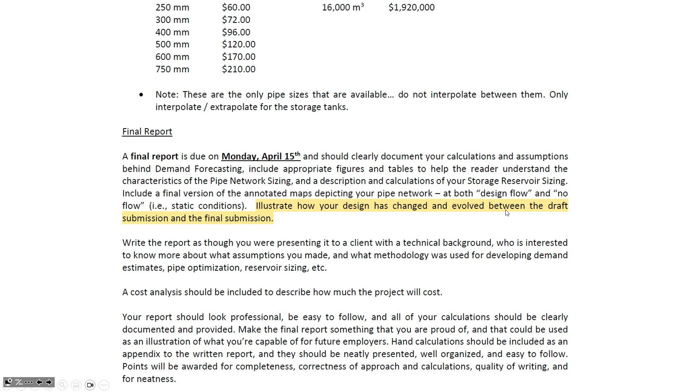All right, gradually varied flow is what we're talking about today. Where we've been recently is RVF. Does anybody remember what the R in RVF stands for? What have we talked about the last couple of lectures?

Oof, we should have had the quiz today. Rapid. Pardon me? Rapid. R is rapid. Good. Rapidly varying flow.

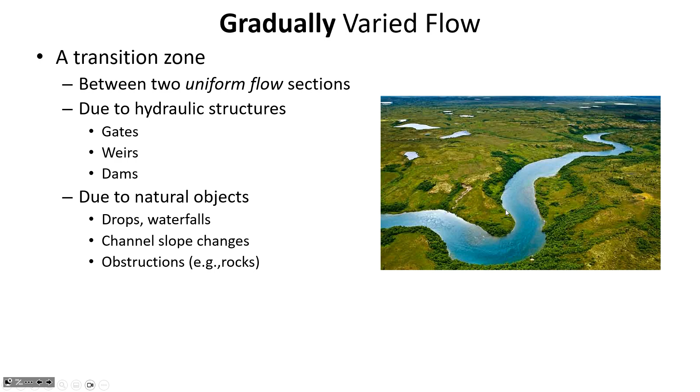Hydraulic jumps is what we've been talking about recently. A hydraulic jump is just a really dramatic increase in the depth of flow. Gradually varying flow is a lot more common than hydraulic jumps. We do see hydraulic jumps.

Like we mentioned before, flow out of spillways—we see hydraulic jumps sometimes in the rapids of a river. But hydraulic jumps are kind of an uncommon thing. When you see one, you'll be pleasantly surprised, you'll take note of it, because it's kind of uncommon to have rapidly varying flow. Gradually varying flow is all around us.

Manning's equation applies when flow is steady and uniform. So in a prismatic channel, where it has plenty of time to reach an equilibrium depth and where the flow rate isn't changing, that's where Manning's equation applies. That happens sometimes, but gradually varying flow is what we often usually see in nature.

Here's a depiction of a meandering stream. As the stream gets deeper in some spots, as the slope is changing, as the channel gets wider and narrower, the depth is constantly on the move. It's changing, getting deeper in one section, shallower in another.

So we need some sort of method that can predict for us what will be the new depth, upstream or downstream. If we know the slope of a section and the depth at one location, we want to be able to predict how deep the water will be a certain distance upstream.

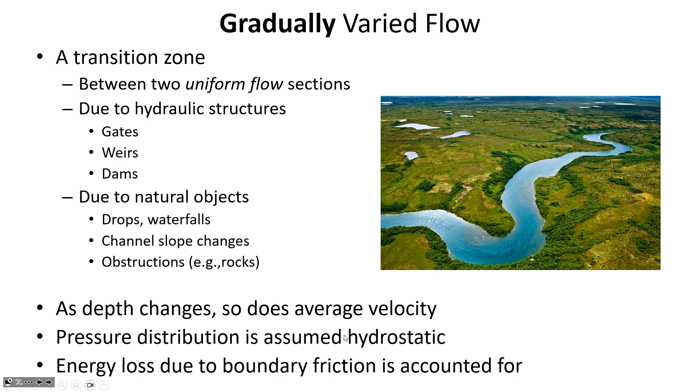We're also going to continue with the assumption I mentioned with rapidly varying flow, that we have a uniform velocity distribution. That's the one that maybe is like nails on a chalkboard, assuming that in a river, where in reality we know the flow is fastest at the top of the stream and velocity decreases closer to the bottom. For simplification in these calculational techniques, we sometimes have to assume the flow velocity is constant with respect to depth, not slowing down as we get closer to the bottom of the channel.

There are a few things we'll want to be able to look at and know what kind of water surface profile we have. There are abbreviations we're going to learn, whether we've got an M1 profile or an S1 profile. There are different zones and classifications depending on the slope of the stream.

We'll get into that a little bit later, but here are just a few illustrations similar to where I showed you previously, things that could cause a hydraulic jump. These are things where we could see gradually varying flow.

If you have an underflow gate where there was pooling upstream, the water is deeper than it normally would be. Here in uniform flow, we have the normal depth, calculated by Manning's equation, but the flow is no longer uniform if we have an obstruction like a gate. So there's pooling upstream, making the water deeper than normal, gradually increasing the depth as you approach the gate.

Or if we had water flowing off the edge of some drop, you can see how that would be reducing the depth.

As you get closer to the drop, the flow depth is decreasing. And you couldn't predict that with Manning's equation. If you knew the roughness of this channel and the slope of the channel, you can calculate the normal depth, but the normal depth doesn't apply because there's some other situation that's drawing down the flow. And so the gradually varied flow depth at a certain location wouldn't be predicted by the critical depth. It's not predicted by the normal depth.

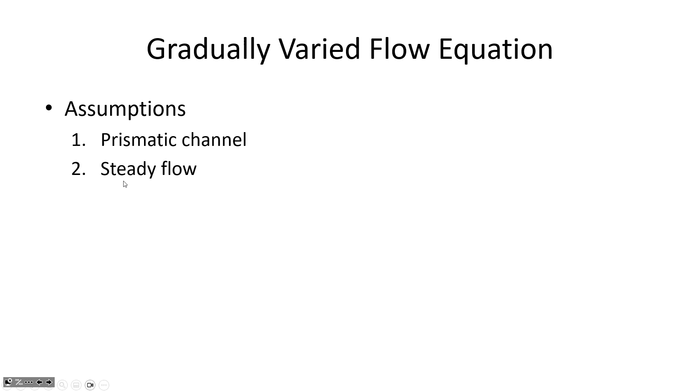So for the equations we're going to apply, we assume that we have a prismatic channel, meaning that we could draw a mirror image about the center line, and it's the same on the left-hand side as it is on the right-hand side. We're going to assume steady flow, so not uniform, but steady flow means that the flow rate is not changing with respect to time. The bed slope is relatively small, so this just allows us to assume that the horizontal distance is the same as the inclined distance. And then here's this really tricky, kind of unpleasant simplification: a uniform velocity distribution. We'll get over it though. There are more sophisticated approaches if we really need the precision, where we could get around that assumption.

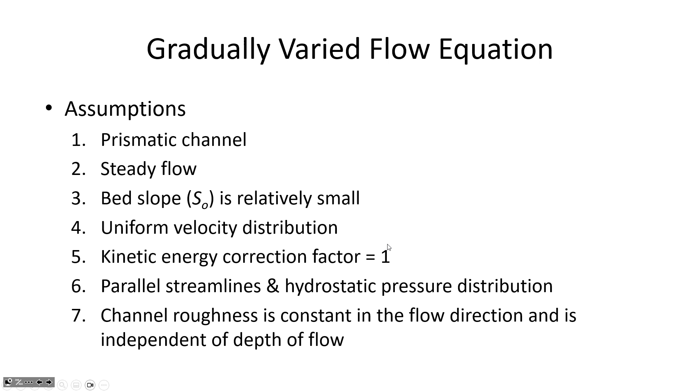The kinetic energy correction factor, you may remember that if you had laminar flow, then the kinetic energy correction factor is 2. We won't have laminar flow. Anytime the water is moving in typical conditions, you have turbulent flow. So we'll just use a kinetic energy correction factor equal to 1. That means the velocity head doesn't need to be adjusted beyond its natural calculation. Hydrostatic pressure distribution, parallel streamlines, and we're going to assume that between two points that we're interested in, the channel is rough to the same degree. So we're not going to introduce a change in the bed type between two sections.

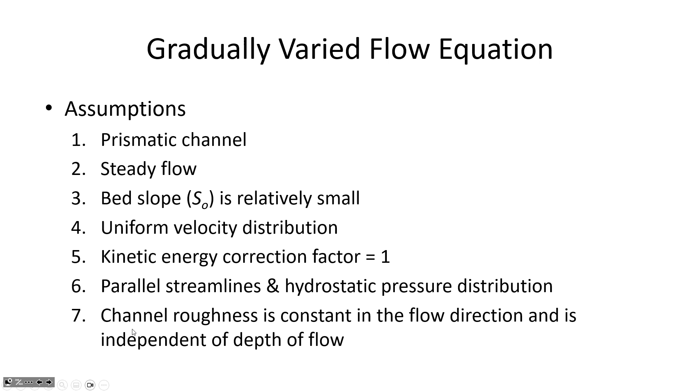So we wouldn't have gravel in one section and then sand in the other and try to calculate the change in depth between those two. We'd have to break it up into smaller pieces if we have a change in the material and the roughness in the direction of flow.

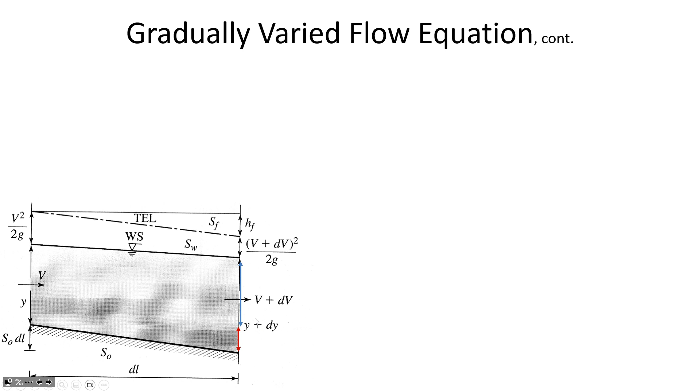So this is a non-uniform flow. The flow is gradually getting deeper downstream. You can see there's an increase in depth compared to the upstream location.

If we want to calculate the energy at any particular location, the specific energy is the depth plus the velocity head. The other thing we want to be aware of is that the change of energy with respect to a change in depth can be estimated with 1 minus the Froude number squared. So if we combine those two things together and substitute in the slope of the energy grade line for the change in head with respect to length, and the slope of the channel bottom...

That's by definition the change in elevation above a datum. So z was, if we have some vertical datum, z is the distance from that vertical datum up to the bottom of the channel. So you can see that as the water's flowing downstream here, z is decreasing, and also the water surface elevation is decreasing, and the energy grade line height is decreasing.

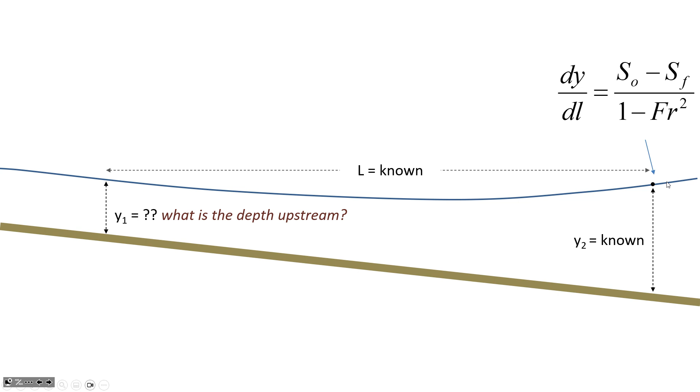So for this classical problem of gradually varying flow, we can use dy/dl to find the slope of the water surface, but only at a point. And here's kind of the problem: this is going to tell us the slope of the water surface at a point, but you can see that the water surface slope is gradually changing between the two points. So we couldn't use the slope of the water surface at just a single point to jump all the way upstream, because if we tried to find the upstream depth that way, we'd extrapolate that slope and it wouldn't match up with the upstream depth location. So you see, if we extend the slope over a really long distance, we can't approximate a curve with a line, not over a big distance.

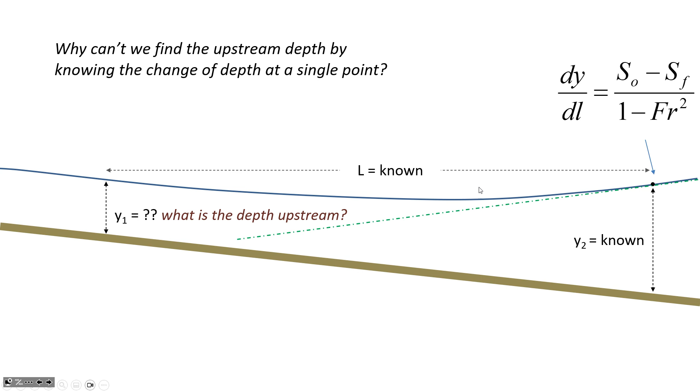We can get away with approximating the curve as a line if we break it up into smaller pieces. So what we're going to do starting on Monday is there's a method where we can use this formula, which tells us the slope of the water surface at a single point, over just small steps. We're going to say, let's use that formula over a small step.

And it's not so bad if we approximate this segment as a line. It's a little bit curved, but it's okay to approximate a small segment as a line. Then we'd find how far it is between these two points where we know the two depths, or if we know the length and the depth here, we could find the next depth upstream. So we have to know two of the three: a depth and a distance to find the other depth, or we could know both depths and calculate the distance between them. But the point is, if we break it into multiple steps and find the slope of the water surface for each segment, we can have sufficient accuracy to make a worthwhile prediction.

So that's the step-by-step method, sometimes called the direct step method, that we begin on Monday. But it all comes down to an application of dy/dl.

Let me pause. Are there any questions so far about the concepts, or what the classical problem we're interested in is?

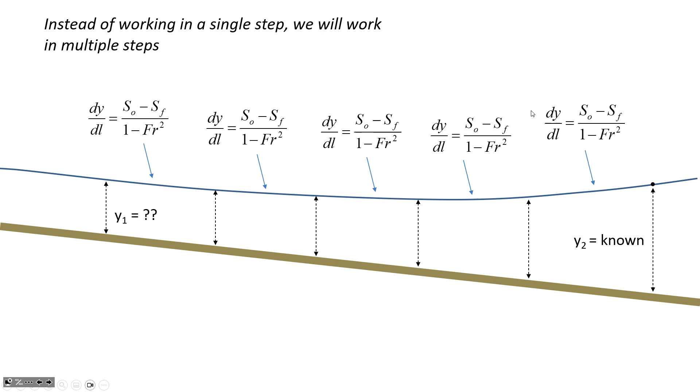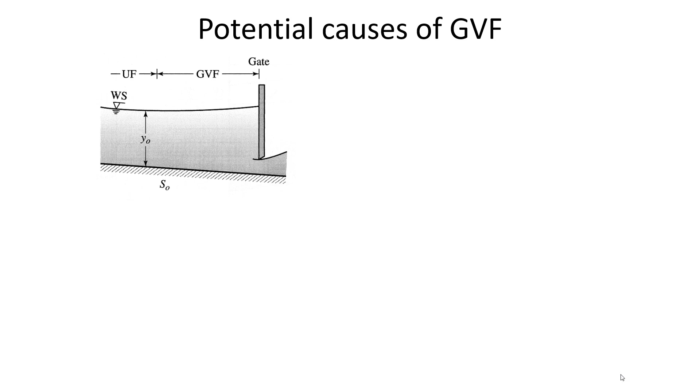Well, rapidly varying flow would involve a hydraulic jump, but there are other things. You probably noticed that when the water was going off the side of the cliff, that was classified as rapid, right? So I don't think there's a cutoff point for how rapid the variation has to be before we call it rapidly varying flow. What I'd say is, if it's a hydraulic jump, that's rapidly varying flow. And maybe it's also rapidly varying flow if the direct step method and the standard step method are no longer getting accurate results because the depth is changing too quickly. Once you get off the edge, when there's no longer a channel bottom, that's rapidly varying flow.

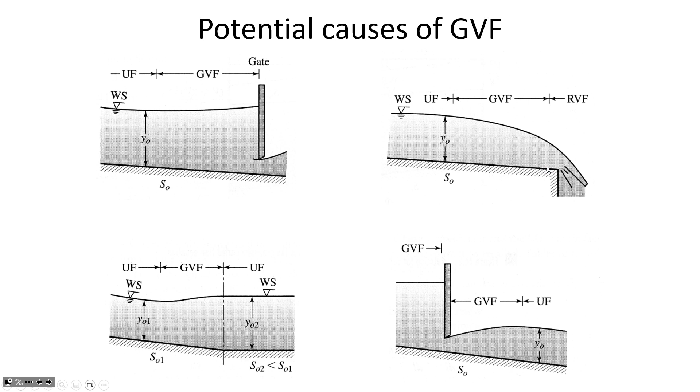But that's a good question, because you'd expect that maybe there'd be, in the same way that we have a discrete threshold for Froude number—Froude number of 1 separates supercritical and subcritical—or in the case of Reynolds number, where 4,000 and above is turbulent, 2,000 and below is laminar, those are real quantitative thresholds. I don't think such a thing exists in classifying whether it's gradual or uniform, or gradual or rapid.

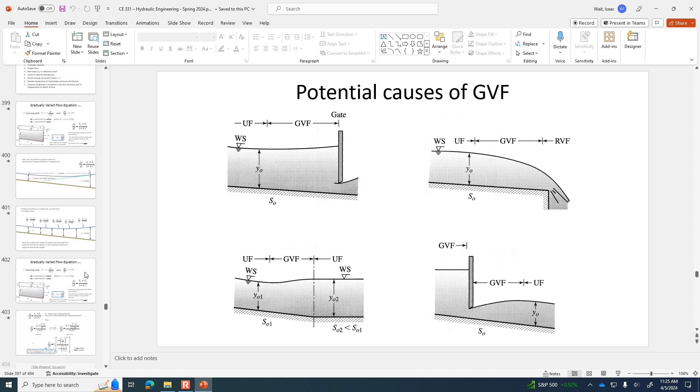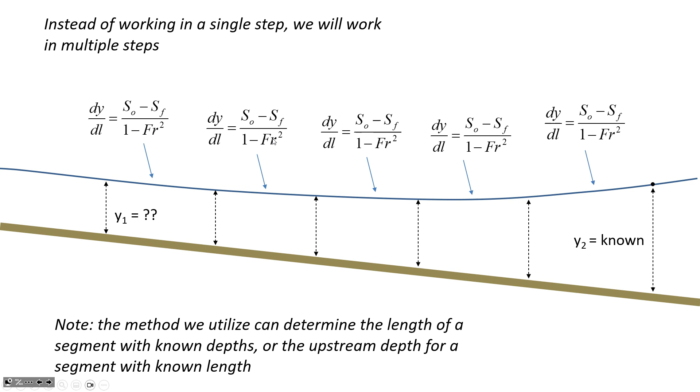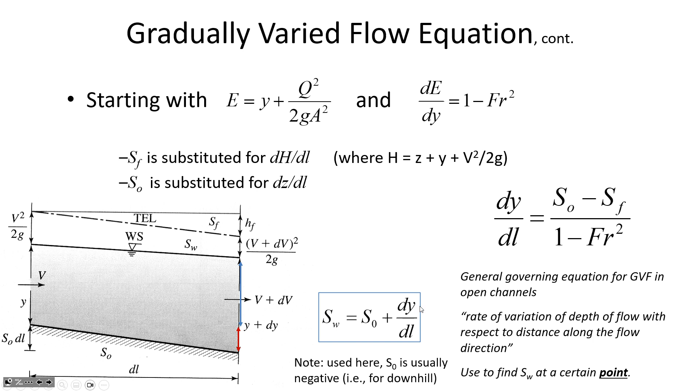Okay, so this is a glimpse of where we're headed, applying this over lots of little segments. So this gradually varying flow equation, we're going to be looking at trying to predict the slope of the water surface. We'll have to know the channel slope and then dy/dl for a certain segment length. So we'll limit either the dl if we're trying to calculate dy, so we'll limit the dl distance so it's not too long, or we'll set a threshold for how much of a dy is acceptable to calculate the distance dl.

So there's a couple of simplifications that can make our lives easier depending on if we have a rectangular channel, or if the rectangular channel is wide from a technical standpoint.

This dy/dl formula, the slope of the energy grade line here, S sub f, we get by using Manning's equation. So we can rearrange Manning's equation, which is Q equals area to the 5/3, slope to the 1/2, divided by n times P to the 2/3. So we can rearrange that to solve for S. And the S in Manning's equation, normally, if we're using Manning's equation, we have steady uniform flow, and so it's the slope of the channel bottom, and it's also the slope of the water surface, and it's also the slope of the energy grade line.

But when we use it with gradually varying flow, what it actually calculates for us is the slope of the energy grade line, so S sub f. So here in this dy/dl, S naught is the physical slope of the bottom of the channel, and S sub f is the slope of the energy grade line, and we're going to rearrange Manning's equation to find it. So we've got an example in a moment where that's what we'll do. We'll rearrange Manning's equation, we'll solve for S sub f.

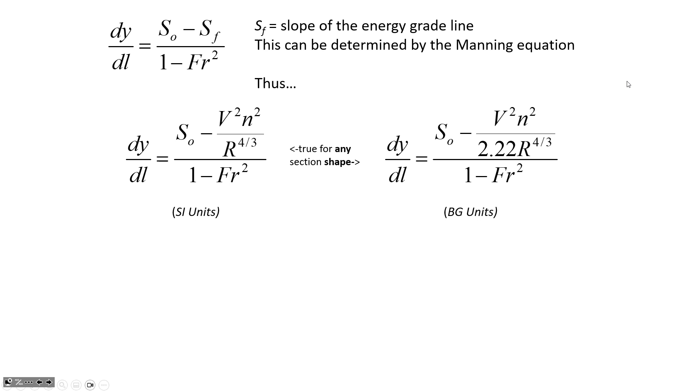And this is true regardless of what the shape looks like. It could be a trapezoidal channel, a rectangular or circular profile. If you've got a wide section, remember wide means the width of the channel is more than 20 times greater than the depth. So if it's wide from that technical standpoint, then dy-dl simplifies a little bit.

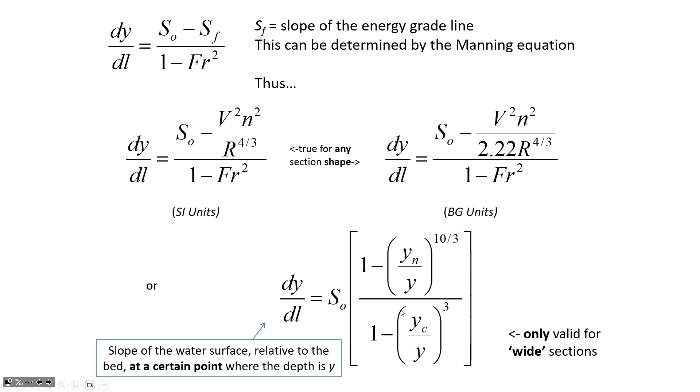So they call this the process equation, or at least our book does. I don't know why they call it that, but it sounds like a pretty good nickname for an equation, so we'll go with it. This is what we'll use for a wide channel in calculating the slope of the change in water depth in the direction of flow.

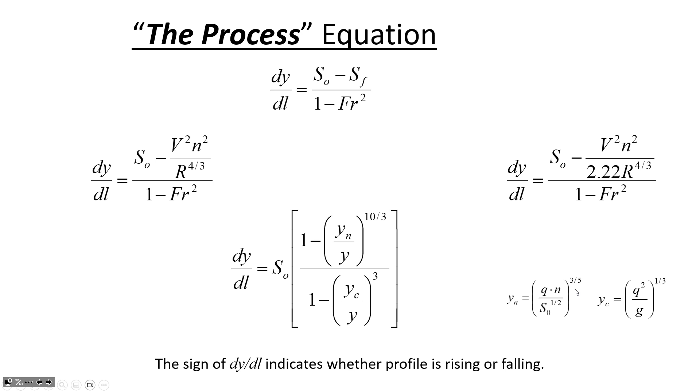And if it's wide, then the normal depth is pretty easy to calculate. So this formula, y sub n, in terms of flow per unit width, n value, and channel bed slope - remember this one only applies if it's wide, and this one only applies if it's either rectangular or if it's wide. But both of them would necessitate us calculating the flow per unit width, lowercase q.

So let's try an example. Let's say we've got a rectangular channel carrying 20 cubic meters per second. It's 40 meters wide and 2 meters deep. So in a beautiful coincidence, this meets the threshold of being a wide channel, which makes it a little bit easier for us to calculate the critical depth and the normal depth.

We know the bed slope is 0.00015, and it says that's downhill. So because that's downhill, that means that when we use S naught here, the S naught is going to be positive. When we want to calculate the water surface slope, we'll use a positive S naught for that part.

I'm going to pause and let you calculate what is dy-dl. To do that, you're going to need to calculate the critical depth and the normal depth, and the y is the depth at the location we're interested in - at the location where it's 2 meters deep, so y is given as 2 meters. Find y sub c, find y sub n, and then put it into the process equation to find dy-dl. So first find y sub c, then find y sub n, then find dy-dl.

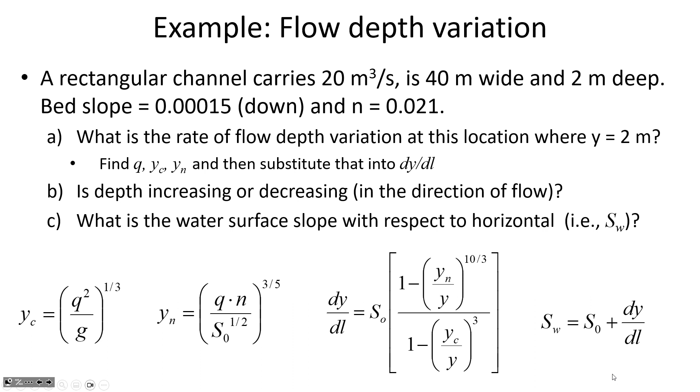Okay, as I was circulating around looking over your shoulder, I saw people seem to be headed on the right track there. The critical depth should be 0.2943 meters. And then when we invoke this assumption that the channel is wide, we can calculate the normal depth a little bit easier than usual. The normal depth is 0.912 meters.

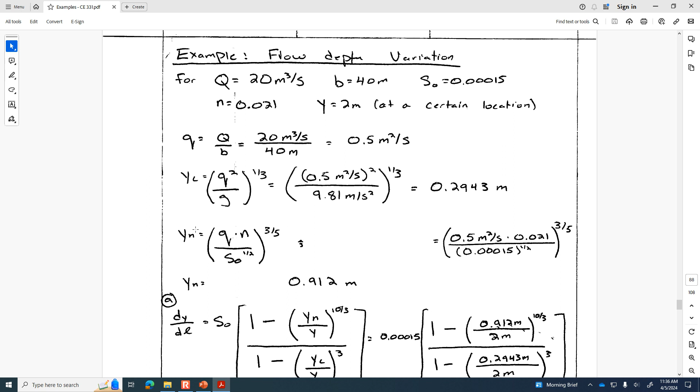So now given that, we can substitute it into the process equation for dy-dl. And if you do that, for the slope of the channel we're just putting in the numerical value, not the sign, so 0.00015.

And then we got to make sure not to introduce a calculation error here. The numerator has this y sub n divided by y term to the 10/3 power, and then the denominator, where we've got the ratio of the critical depth to the depth, that's to the 3rd power. It's easy to make mistakes. My recommendation is to keep scratch paper and write your intermediate calculations along the way, double check, triple check as time allows.

But what we get here is that dy-dl should be 1.39 times 10 to the negative 4th. So that's a positive value, and it means that the water is getting deeper downstream. So the dy is increasing - the water depth is getting deeper in the direction of flow.

By the way, before we move any further in this example, does anybody have questions on critical depth or normal depth or the process equation?

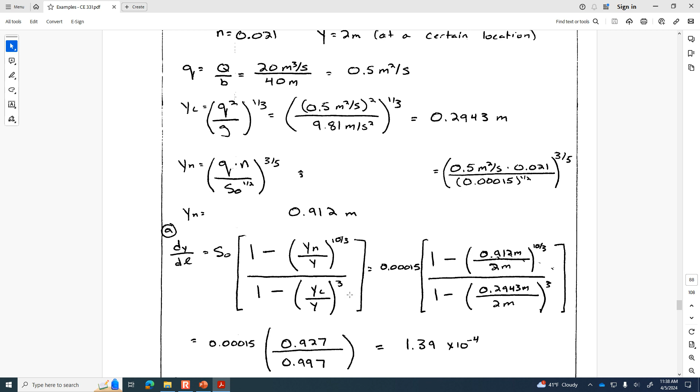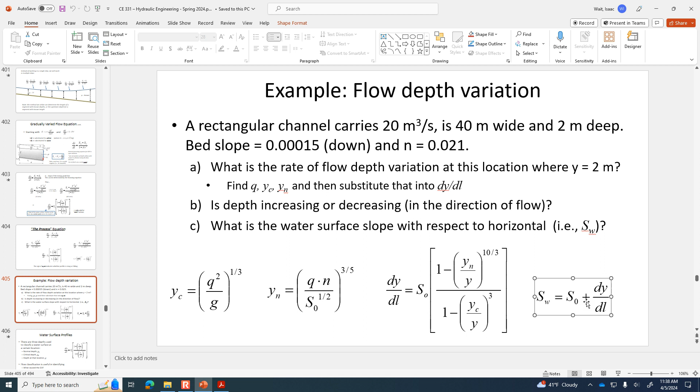The example also asked, what is the water surface slope with respect to horizontal? So if we want to find S sub w, that's where we use the dy/dl that we just calculated and combine it with the downhill bed slope. Let me show you what that looks like.

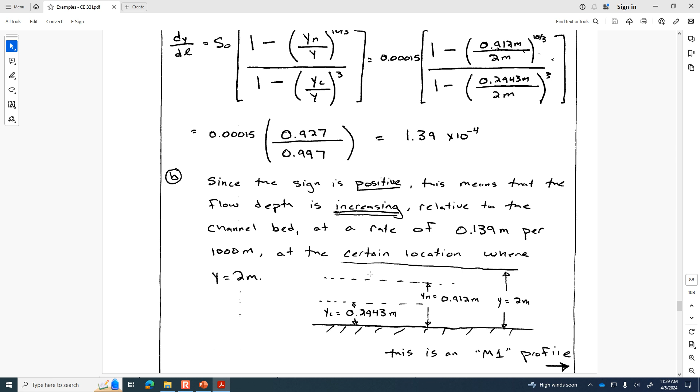Here's the water surface slope. The water surface slope is negative. So relative to horizontal, the water surface slope is downhill, even though the water is getting deeper. That's because the channel slope is steeper than the rate that the water depth is increasing. So dy/dl is 1.39 times 10 to the negative fourth, but the channel slope is negative 1.5 times 10 to the negative fourth. So of the two, the channel slope is more negative than the water surface, even though dy/dl is positive.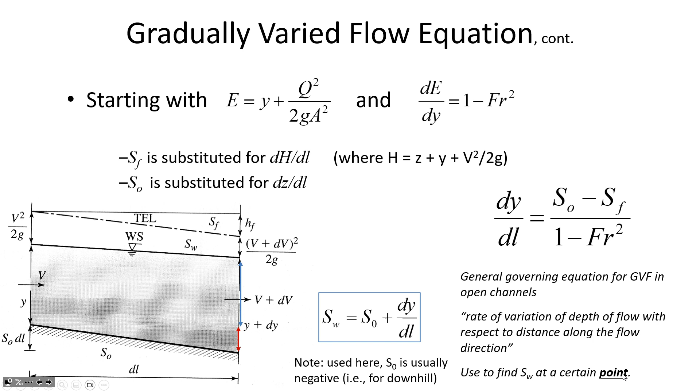So relative to horizontal, this figure is another good illustration of it. We can tell that the water is getting deeper in the direction of flow. You can just see it. It's getting deeper, but the water surface slope is still downhill compared to horizontal. Compared to horizontal, the water surface slope is pointing downward. So it's not like the water surface slope is positive in this case. It's still negative. So the water's getting deeper, but yet the water's still flowing downhill.

So that's how we calculate S sub W. Any questions before we move on from that example and look at some of these water surface profile types?

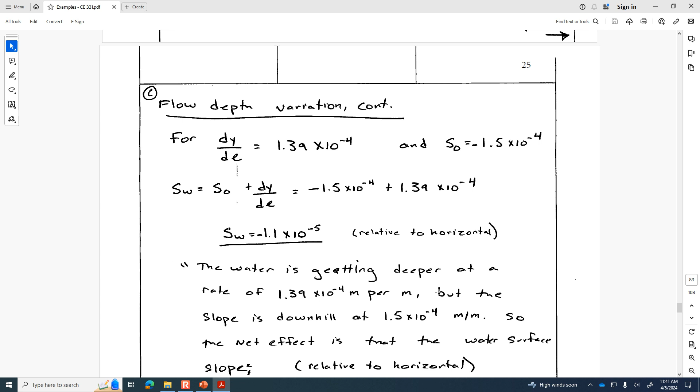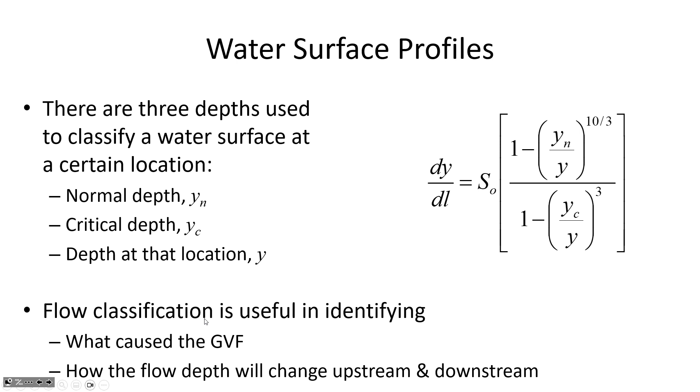All right, so it's important when classifying the water surface profile to calculate the normal depth, the critical depth, and compare it to the known depth at a certain location. It's useful to know the water surface profile because you can understand whether the flow is increasing or decreasing in the direction you're interested in just by knowing the water surface profile type, and you can sometimes infer the cause of the gradually varying flow.

So the first thing we do is look at the bed of the channel. A mild slope, classified as M, is when the normal depth is greater than the critical depth. You already know this from specific energy diagrams and momentum depth diagrams. The idea that normal depth greater than critical depth is what you previously called subcritical flow. Well, what kind of slope causes subcritical flow? A mild slope. That's why we call it mild when the slope is less steep than the critical slope, or when the normal depth is greater than the critical depth.

A steep slope is the opposite, when the normal depth is less than the critical depth. Critical is when the two are equal. Horizontal and adverse are fringe cases you'll almost never see, but technically they do exist. If a channel is temporarily horizontal through a section, we can calculate a critical depth, but there's no such thing as a normal depth if there's no slope. Same thing if water's flowing uphill briefly—you can calculate the critical depth for those flow conditions, but there would be no corresponding normal depth.

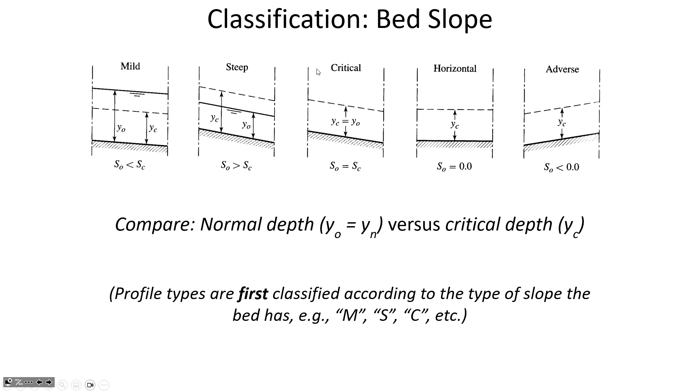So the profile type is first classified by what type of slope you've got: mild, steep, critical, horizontal, or adverse. The next thing you do is look at where the flow depth is with respect to one of three zones. If your given flow depth is bigger than the critical or normal depth, that's zone 1. If it's between them, that's zone 2. If it's smaller than either normal depth or critical depth, you're in zone 3. So those are the three zones—you kind of just need to memorize this. It's important.

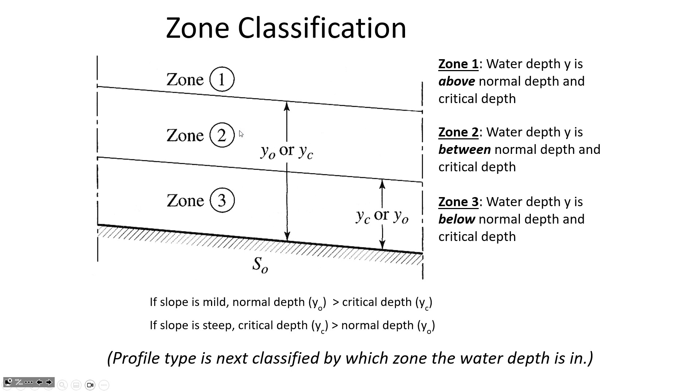On the final exam, you're almost certain to have a problem where I ask you to classify the water surface slope. I'll say, determine the water surface profile. That means you'll have to first figure out: is it mild, steep, critical, horizontal, or adverse? Then you'll have to see if the given flow depth is greater than the critical and normal, between the two, or less than critical and normal.

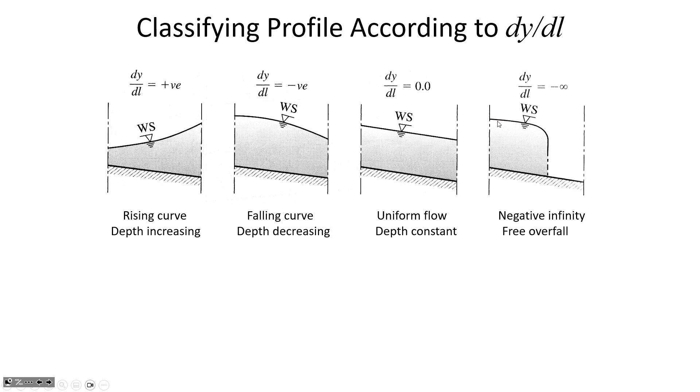If you've got a positive dy/dl, the water depth is going up compared to horizontal. Decreasing means it's getting shallower in the direction of flow. If the water surface slope in the direction of flow, dy/dl, is 0, that means it's uniform. Infinite means water's flowing over some sort of an edge.

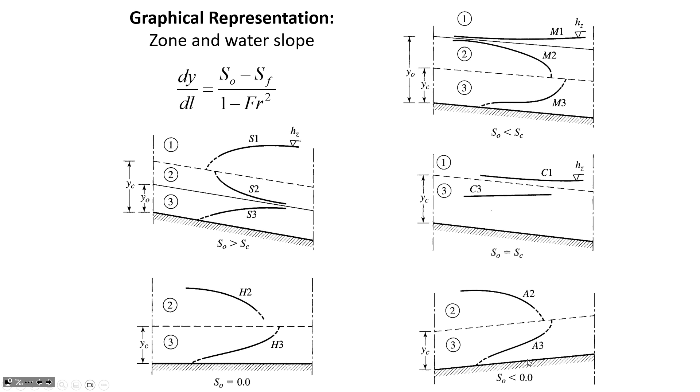An M2 profile could be caused by water flowing over an edge. Or an M3 profile could be caused from water under an underflow gate prior to the hydraulic jump.

Steep slope causes: if we have a steep slope, meaning the slope is greater than the critical slope, and water approaching an obstruction, it would go through a hydraulic jump because it's going to be subcritical briefly. So an S1 profile is where you have subcritical flow on a steep slope, caused by some sort of an obstruction that induced pooling. Then it goes through S2 as it's drawing back down again and reaching its normal depth.

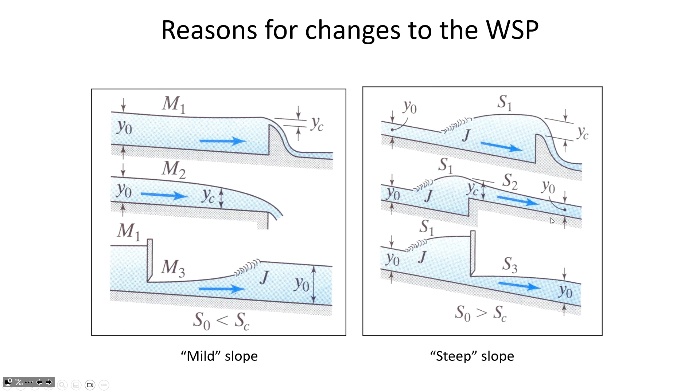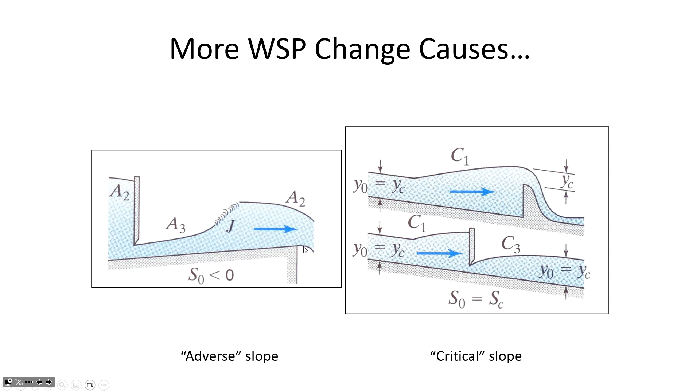Adverse and critical I don't want to spend too much time on because they're kind of fringe, unlikely things, but you could see what would potentially cause an adverse 3 profile: supercritical conditions on an uphill slope, like an underflow gate approaching a drop-off where you had an uphill slope.

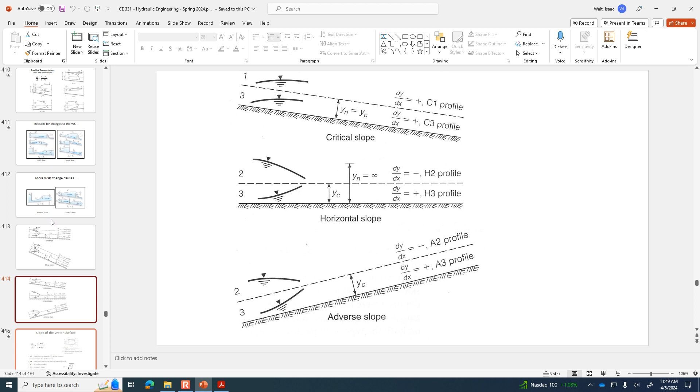Okay, let's leave it there for today. This is just a couple of other figures describing water surface profiles. We'll take another look at those on Monday. You've got plenty to keep you busy.